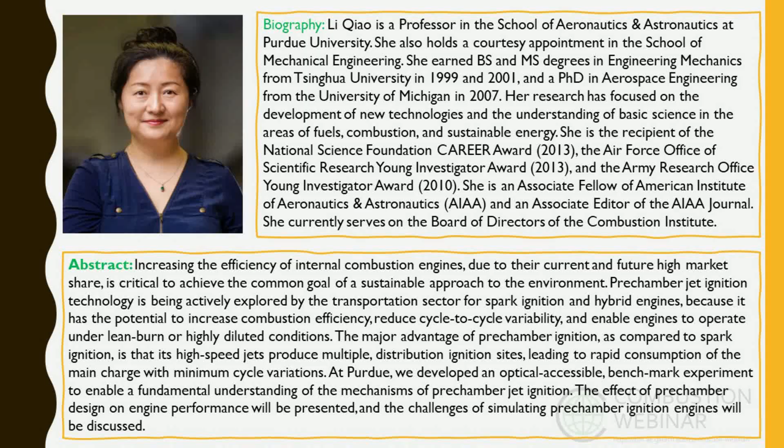Thank you very much, Peng, for your kind introduction. I would like to thank the organizing committee for inviting me to give a webinar. I remember when the pandemic just started, March 2020, we were stuck at home, couldn't go to conferences, couldn't travel. Professor Yiguang Ju and Professor Wenting Sun started this webinar, and quickly we had organizing committee members from all over the world. Every Saturday morning at 10 o'clock, a colleague in the community would share their research with us. This became something we looked forward to during the pandemic. Even though things have gotten better, the pandemic is not completely over yet, but I appreciate this opportunity to connect with colleagues and learn what other people are doing. This is really great.

Today I would like to talk with you about the work on Prechamber Turbulent jet ignition for combustion engines that my group and our collaborators have been doing in the past couple of years. Before that, I would like to acknowledge my graduate students who participated in this research: Dr. Sayan Biswas, who is now an assistant professor at University of Minnesota Twin Cities, and Dong'en Li and Tian Xiaoyu, my current PhD students. The work is sponsored by Caterpillar, Aramco, and Ford.

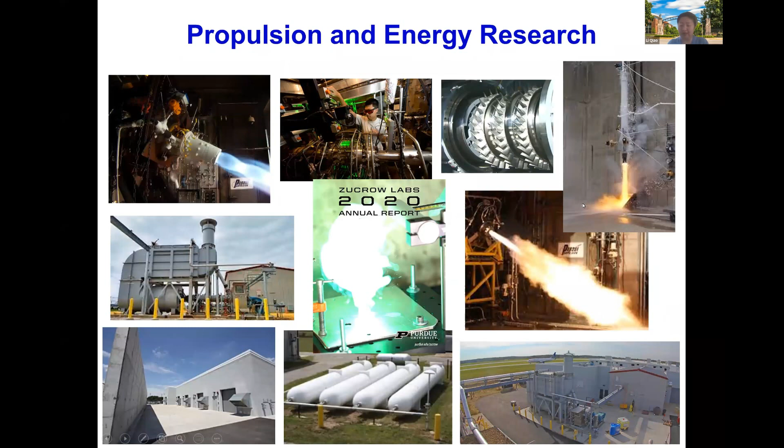Electric cars obviously have a lot of advantages, efficiency and scalability, that's definite. But hydrogen cars, hydrogen derived from renewable sources like water electrolysis, also have a lot of advantages, especially in applications where the energy density requirement is higher.

For hydrogen, there's also competition between hydrogen combustion engine versus hydrogen fuel cell. Fuel cell has higher efficiency, perhaps maximum 52 versus 48 for hydrogen internal combustion engines. But fuel cell has a high requirement on fuel purity - its tolerance to impurity is not that good. Also, manufacturing at scale is a problem, the cost is high.

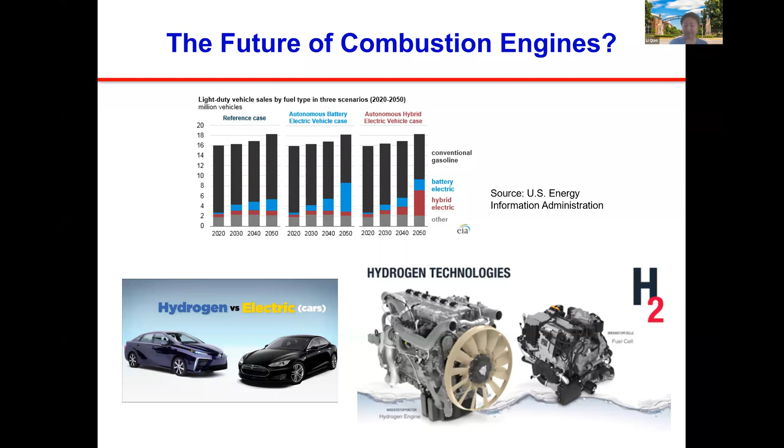So let me talk about what is Prechamber TJI. TJI means turbulent jet ignition. Here I'm going to play two movies so you can clearly see what is Prechamber turbulent jet ignition.

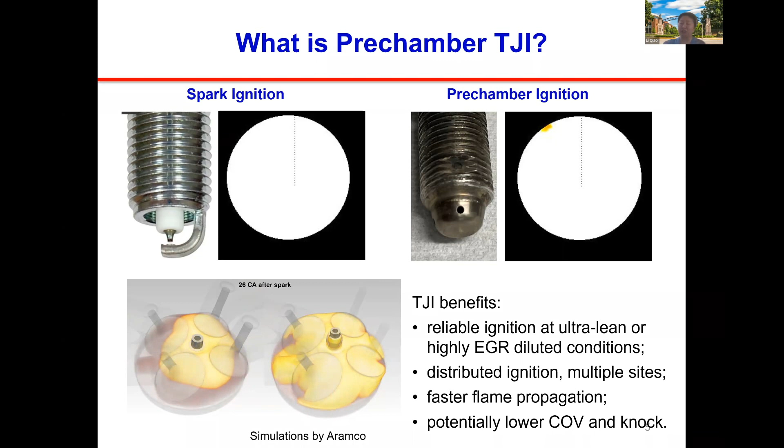So you might ask, what are the benefits of TJI? Well, first of all, for IC engines that are either ultra lean or highly EGR dilution, a challenge is how do we push the limit, because when it's very lean or highly diluted, it's hard to ignite the mixture. Now, TJI has an advantage because the ignition is not point ignition, rather it's distributed, multi-site, on the surface of these jets, which causes reliable ignition, faster flame propagation, and potentially lower cycle-to-cycle variation, and mitigates knock.

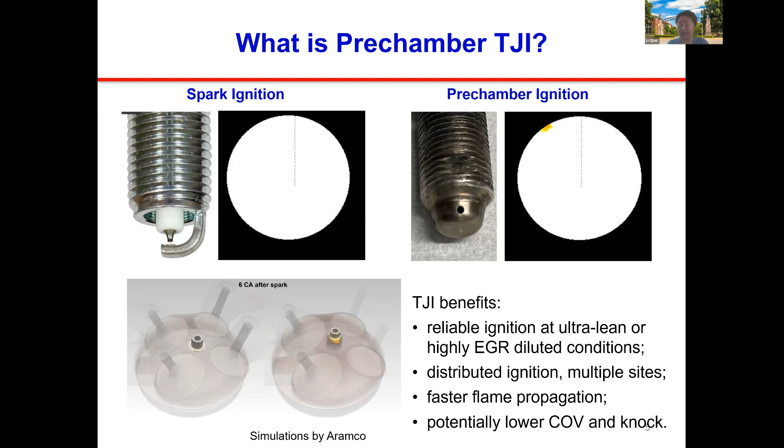So the next question is, Prechamber TJI is not a new technology - it's been around for a few decades. What are the engines that use Prechamber TJI? I want to give you a couple of examples.

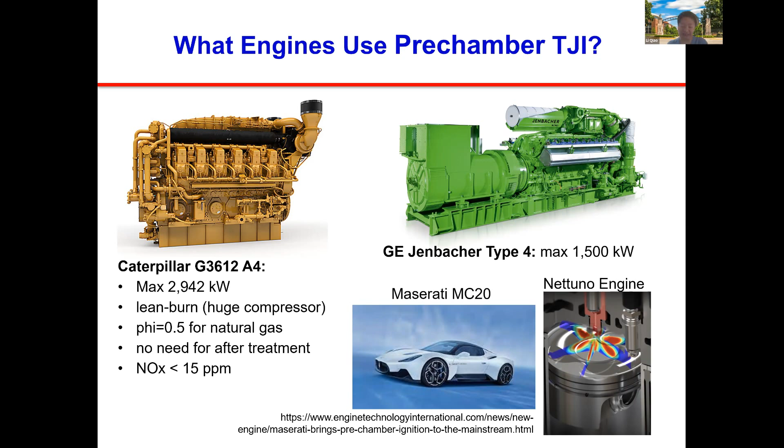Prechamber ignition for gasoline engines is new. Currently, none of the passenger cars on the road use prechamber jet ignition. This is still at a very early exploration stage for gasoline engines. But the good news is that one OEM is putting prechamber in their cars.

In a few years, we'll probably see passenger cars that use prechamber jet ignition. Here I used slides from my collaborator, Dr. Xin Yu at Aramco. We've been collaborating for 3 years. Aramco is a pioneer in prechamber jet ignition technology.

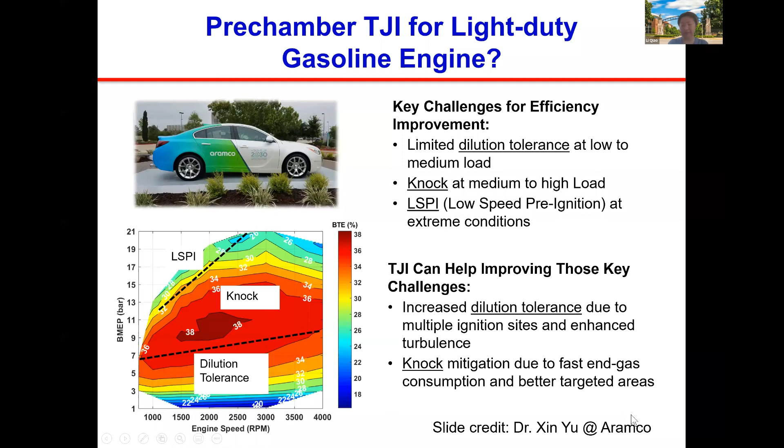In general, prechamber volume is very small, between 1 to 5% of clearance volume. For gasoline engines it's around 1%; for large bore natural gas engines, it can go as high as 5%. The nozzles are very small - the smallest I've seen is about 0.5 millimeter, and the largest, for large natural gas engines, can be as large as 5 millimeters. In terms of number of nozzles, I've seen as few as 4, and the maximum I've seen is 24. These tiny holes have interesting arrangements for optimizing aerodynamics - they're angled, and they could be layered.

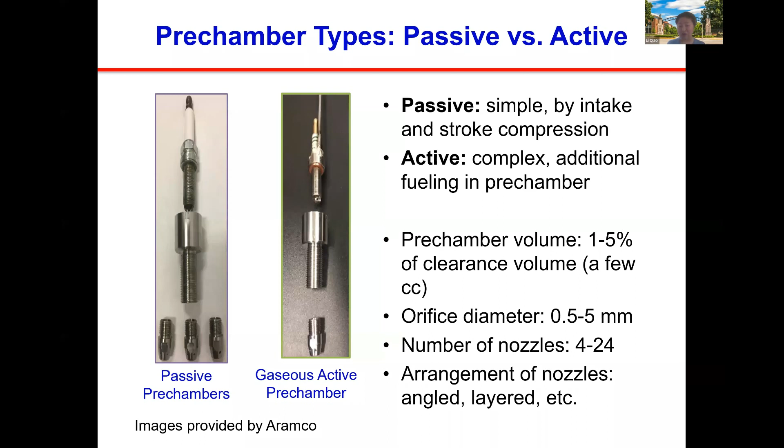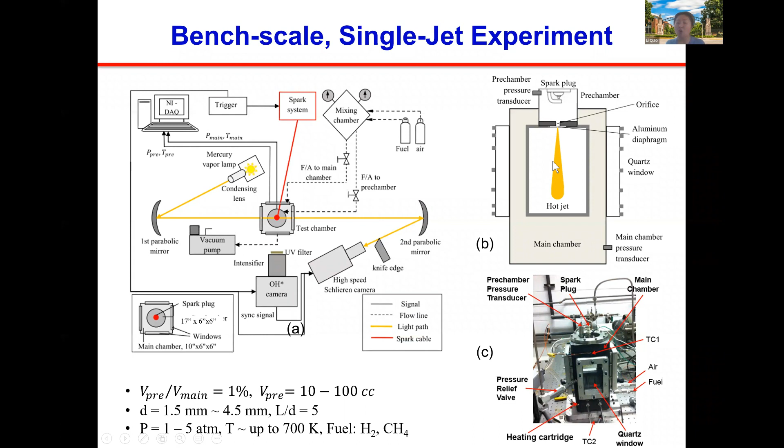Next, I'll share some results from my lab. Fundamentally, you have hot jets - the combustion result from the prechamber - that penetrate into a fresh, unburned, cold mixture. So this is basically a turbulent jet problem. To better understand the fundamental mechanism of jet ignition, we developed a single jet experiment. We designed a prechamber with volume about 1% of the main chamber, with a spark plug and only one nozzle, generating a single jet. Because it's optically accessible, we can do visualization, high-speed imaging, and quantitative measurement to understand how the properties of the jet correlate with the ignition outcome.

First, I want to show you the ignition mechanisms. We tested different prechamber designs, varying the orifice diameter, the nozzle diameter, and the pressure and temperature of the environment. We found there are two ignition mechanisms. The first is called jet ignition - from the images, we can determine that the jet is basically made of hot combustion products with minimal active OH radicals. This basically means that when the prechamber flame tries to pass through this tiny nozzle, less than 1 millimeter, it gets quenched, so what comes out is just a hot product jet.

Let me play this simultaneous Schlieren and OH chemiluminescence imaging to show you - let me play them together. This is one single jet, and this is the nozzle at the very top.

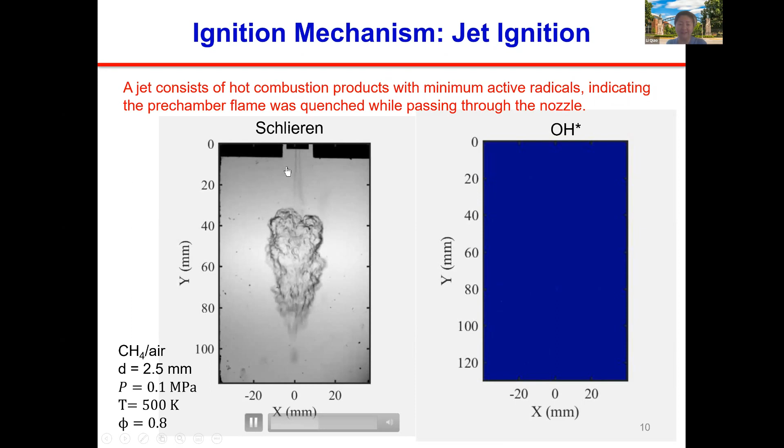Okay, they push some cold gas. Now this is the jet, right? The jet's coming out, and then ignition takes place over here and then it expands.

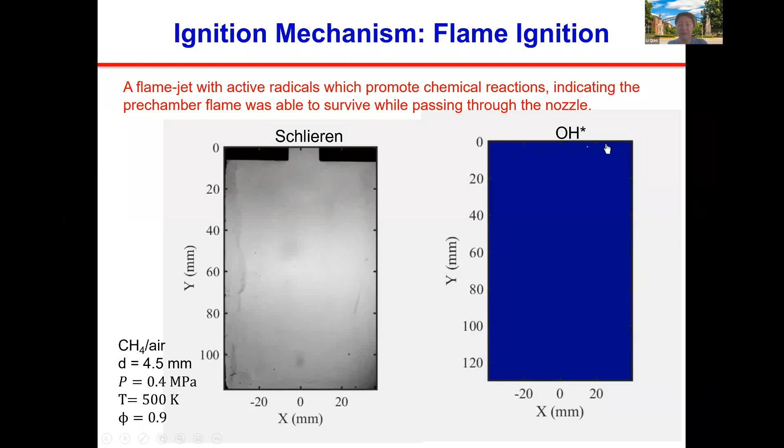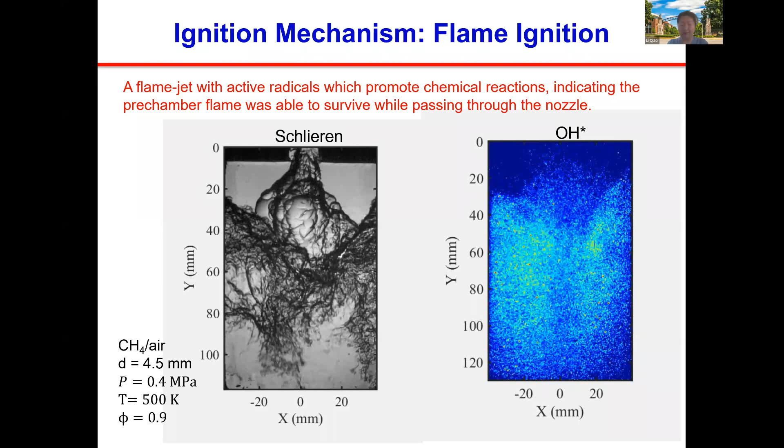I'm going to show you another, which we call flame ignition, because we found a lot of OH radicals when the jet's coming out, which means that when the flame passed through this tiny nozzle, it survived. You still have the flame front with active radicals. So this is perhaps a better illustration.

So when the jet started coming out from the orifices, in the left case, we see appreciable OH signals. But on the right-hand side, there's no signal until sometime later. Downstream of the jet, ignition started to happen and then propagate upward, downward, left and right.

Like expanding. And also from the pressure measurement we see for flame ignition that the main chamber pressure rises quickly, right? Because ignition, burning immediately took place. But for jet ignition, there's a considerable delay.

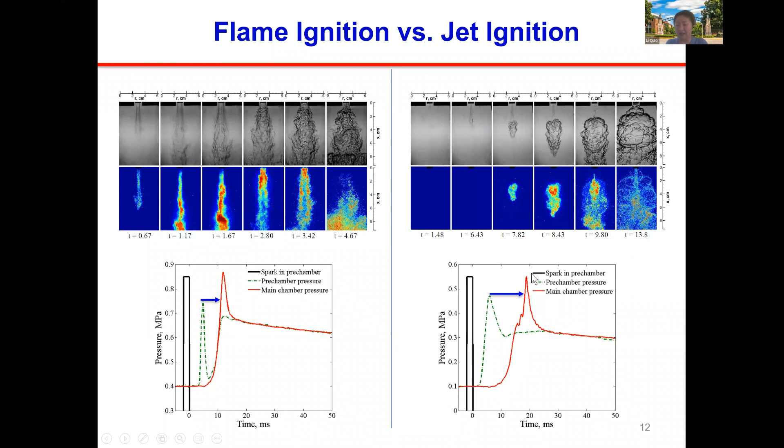That means the jets keep penetrating, and then after some time, perhaps when the environment, which is the Damköhler number, is appropriate, ignition takes place, and we observe the pressure rise of the main chamber like there's a delay.

So this is essentially a fundamental problem: what happens when a flame tries to pass a small nozzle, right? A small channel orifice. This has been studied a lot in the literature.

We know when a flame tries to pass through a small channel, there's heat loss to the walls. There could be radical quenching, and there's also high stretch because these jet speeds are very high, could be a few hundred meters per second. So these flame fronts are highly stretched, which can also cause extinction.

So really the question is, the flame will be able to survive or quench depending on all these factors, right? Stretch rate, heat loss, radical quenching.

Now, what we found was if we decrease the nozzle diameter, we observe more jet ignition, and you can explain that: when the flame tries to pass a smaller nozzle, there's a higher stretch rate and higher heat loss rate, which makes extinction more likely to happen.

Another thing is that if we increase pressure, we find that flame ignition tends to dominate. We tend to find more OH signals out of the jets, out of the pre-chamber. I guess you can use the quenching distance concept to explain it, because quenching distance decreases with pressure. So for the same diameter, as pressure increases, the flame has a better chance of surviving.

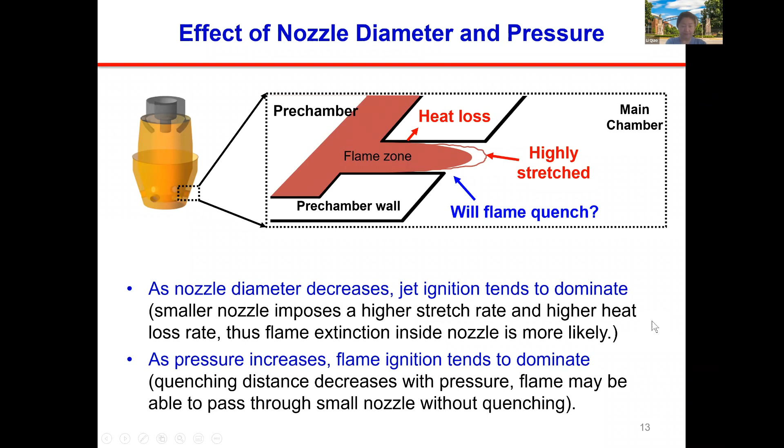I want to play a video that's just for fun, because we observe when natural gas or hydrogen operates at a very lean condition - in this case, phi equal to 0.25 for hydrogen - combustion instability starts to show. You see the flame, the jet flame start to oscillate. That's the instability at lean burn conditions that we will need to address.

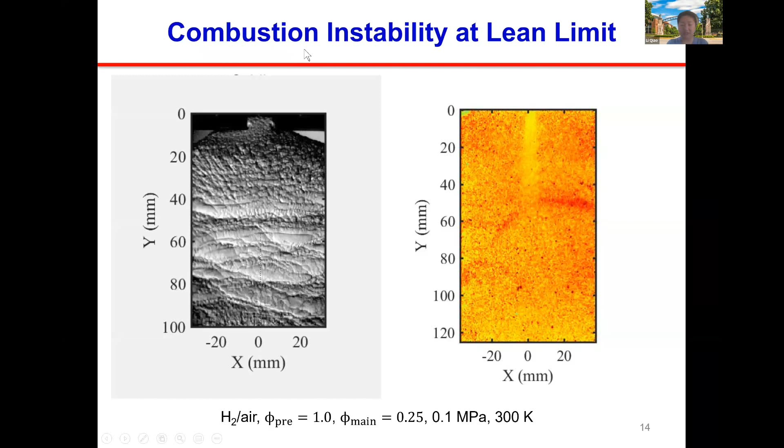Next, I'm going to talk about our engine rig. Basically, our collaborators said, well, these single jet experiments are very helpful - you have quantitative measurements that can help validate CFD or modeling results. But we really want something closer to an engine, so that it will be more helpful in terms of pre-chamber design and optimization. So we developed an engine rig.

This is not really an optical engine. The whole setup is based on a GM 4-cylinder gasoline engine, but we only activate one cylinder, okay? We modified the cylinder, installed optical windows from the sides and the bottom so we can visualize the jet. We also fixed the piston, so it's not moving, because we want to focus on the jet penetration, formation, and ignition processes.

So this is about the setup. I would like to show you a couple of movies to give you an idea of the jet process, which obviously depends on how you design the pre-chamber. Again, because we don't have a dyno, this is a real engine configuration where the inlet and exhaust valves are operated by an electrical motor.

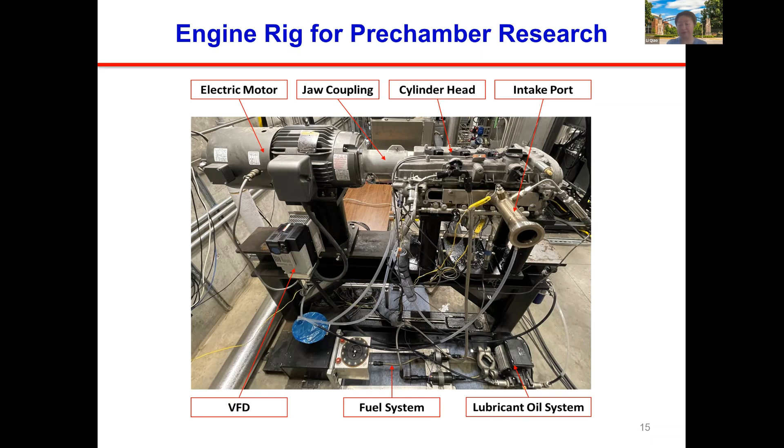So I want to show you the jet formation, penetration, ignition processes, and I'm going to use two pre-chambers. So the left one, as you can see, this is the pre-chamber volume, about 1.2% of the clearance volume.

This pre-chamber has, on the bottom, 6 holes with a nozzle diameter of 1 millimeter. The total area basically means the number of orifices times the area of each nozzle. The volume is about 1,210 cubic millimeters. This is the V/A ratio, a very important design parameter for pre-chamber optimization.

So there are a few cycles in the movie. You see 6 jets coming out and then igniting the mixture and then keep burning the main charge. This is the first cycle. As I said, there are multiple cycles.

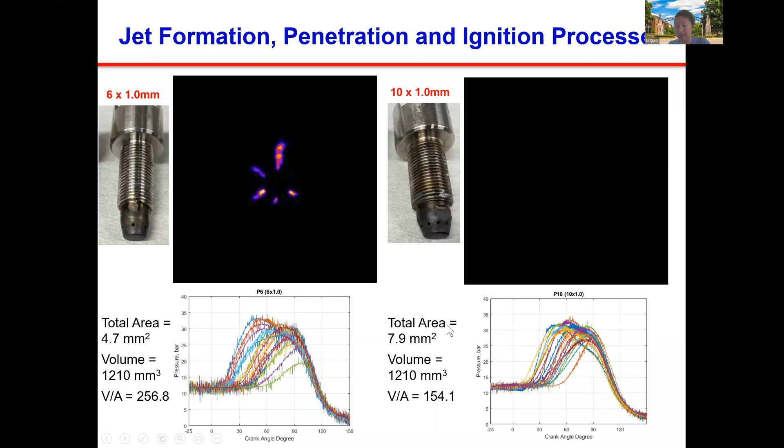Next, I'm going to show you the jet processes for a different pre-chamber. All the parameters are the same between these two. The only difference is I have 10 nozzles. So you see there are 10 nozzles on the bottom of the pre-chamber. The total area increased, but volume and other parameters, including geometry of the pre-chamber, are the same.

So you see 10 jets coming out, pretty uniform in this cycle. Another cycle comes in. You see, in this case, these two jets seem to occur later. A third cycle.

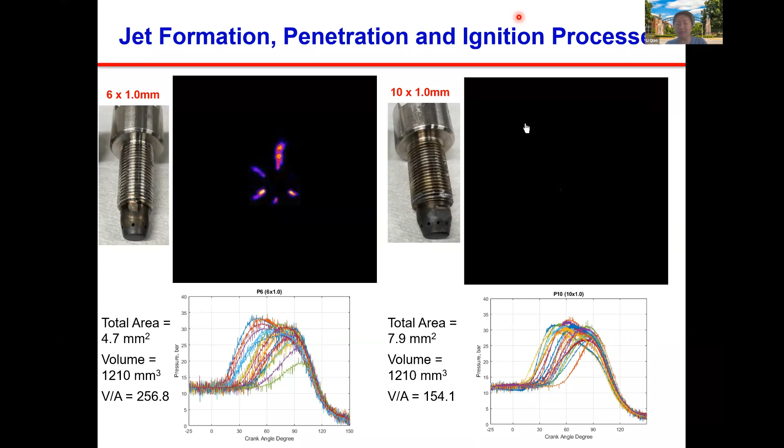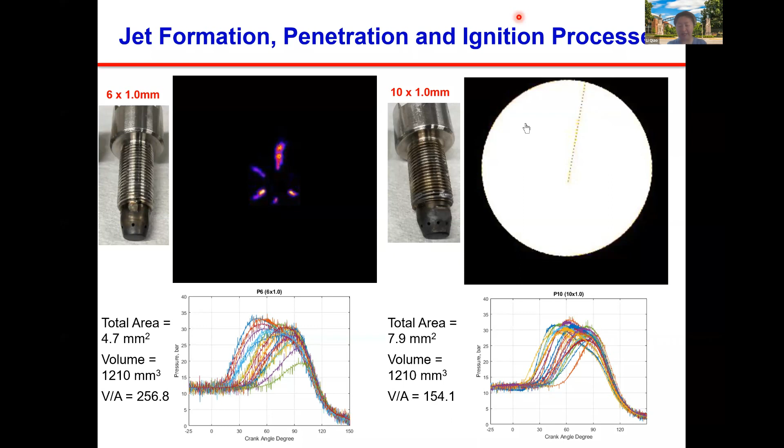All right, so with this visualization of the jets and measurement of pressure, that helps us correlate the jet patterns with the main chamber combustion process, such as burn rate and cycle-to-cycle variation and so on.

From these videos, we observe, in some cases, depending on how many nozzles you have, ideally if you design a pre-chamber with 6 nozzles, you'd like to have strong jets coming out of all 6 nozzles, and then quickly spreading and penetrating into the main chamber. But that's not always the case.

We observe that sometimes the jets are more uniform in terms of performance. Other times, one or a few jets dominate and the other jets just disappear. Here I want to give you an example. This is a pre-chamber with 4 nozzles. The first video shows the jets more or less equally distributed.

Oh, what's going on? Can you see the movie? No.

Okay, it's coming. So this is what I call evenly distributed 4 jets. The 4 jets are more or less symmetric.

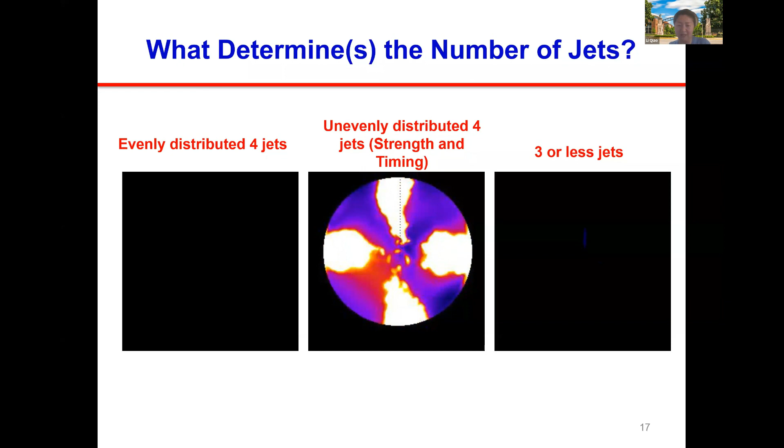Okay, can you see the middle movie? So it looks like the top and right jets ignited the mixture earlier than the other 2 jets. Again.

On the right-hand side, I'm having a little trouble with these videos, but nevertheless, you see 3 jets. That means there's 1 jet coming out, but then it kind of died. This is on the far right. You see the 3 jets, top, bottom, left, but the right jet disappeared.

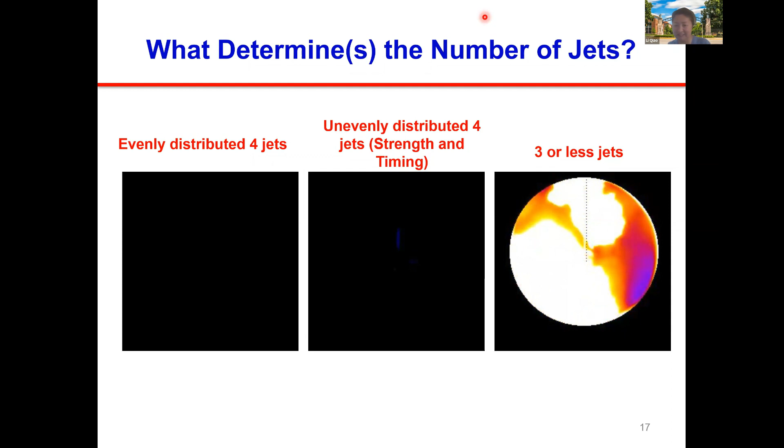So the question really is, what determines the number of jets coming out from these nozzles, and what are the properties of the jets? For sure, we know the property of the jets, such as velocity, turbulent kinetic energy, temperature, and dissipation rate, are all responsible for the outcome, which is ignition and flame propagation.

But the question here is that ideally we would like to have as many jets as possible coming out, and then each of the jets would be able to ignite and quickly consume the main charge. So what determines the number of jets?

So we did some simulations using Converge. The conclusion is that the key factors are pre-chamber lambda and EGR distribution. This means the average lambda and EGR level are important, but the distributions are equally important, if not more.

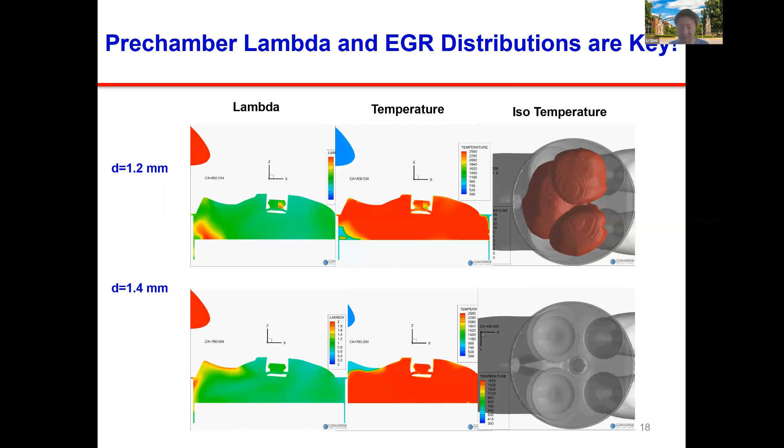Let me... Okay, now the bottom one, let's see if my mouse works. Okay, the bottom one looks like it's playing now, the movie. Again, you see the jets start coming out from the right. In the left one, actually, we did not see a jet. Again, that's related to the local lambda in the nearby region of each nozzle.

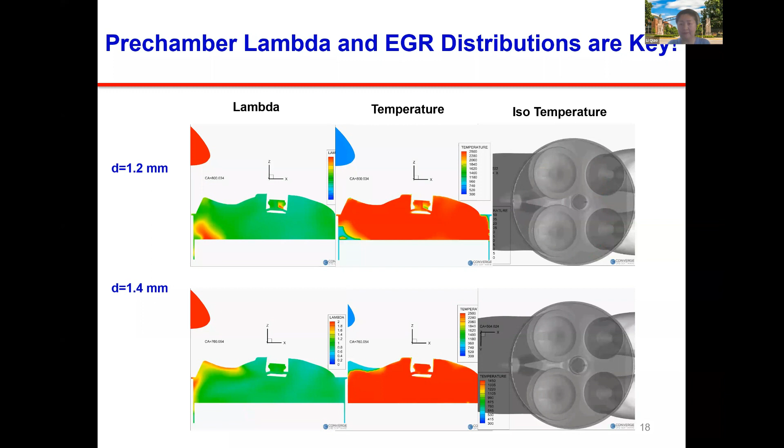Now, next couple of slides, I want to share with you some of the engine testing results, which are very promising. I hope that you will get excited about these. Again, these results are from my collaborator, Dr. Yu from Aramco. So they did engine testing of pre-chambers.

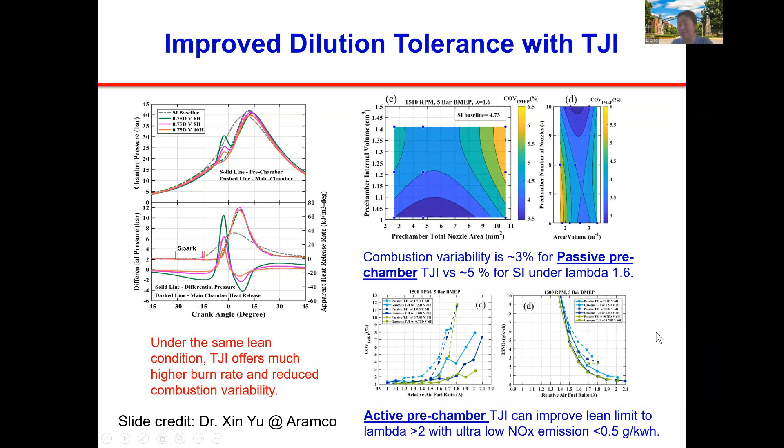Now the bottom one shows the COV and NOx level for passive and active pre-chambers. One significant finding is that if you look at these bottom 3 curves, those are for active pre-chamber. Basically, they injected methane as a fuel to the pre-chamber, active pre-chamber. So this can push the lean limit, the lambda value, from typically 1.7, 1.8, now to above 2. So TJI can improve the limit to above 2. And if you look at the NOx emission, it's less than 0.5 grams per kilowatt hour.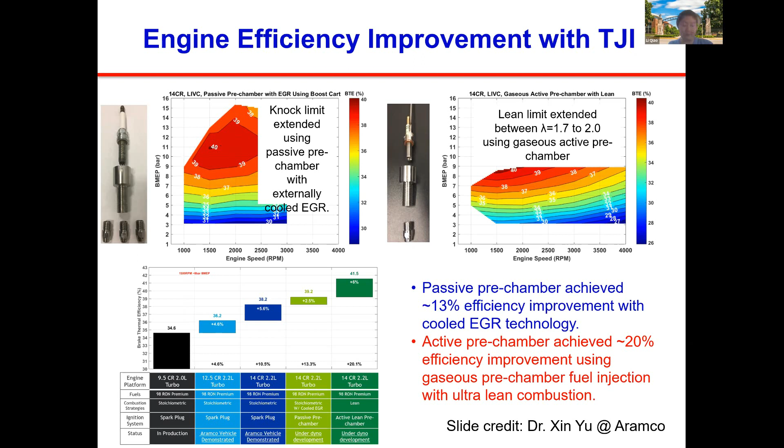All right. So I've described some promising engine testing results of both active and passive pre-chambers. Next, I want to talk about challenges of simulating pre-chamber ignition engines. We often hear from our collaborators and colleagues in industry that many of them use CONVERGE simulations.

It's hard to match engine testing results with simulations, and this has caused us to really think about what really happens to the combustion mode when you add a prechamber to a gasoline engine or a large bore natural gas engine. So here I have the famous Borghi-Peters diagram.

I know everybody is very familiar with this. This diagram is in log-log form, so the whole area is divided into different zones because the physics are different in terms of combustion mode. For example, laminar flames, and on the right-hand side, wrinkled flames, corrugated flamelet. Here is basically flamelet, and then all the way to wrinkled flame, thin flame, and eventually thick flame. This region we used to call broken reaction zone. For SI, spark ignition operation, it's here - this is the brown area. Mostly the condition falls into the corrugated flamelet zone.

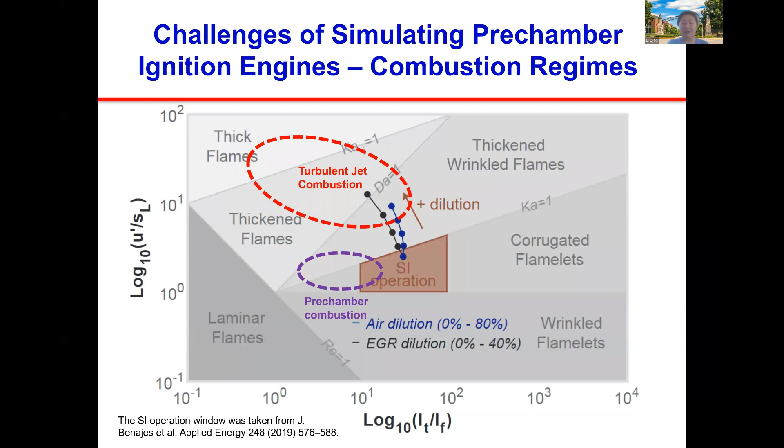Okay, this is my last slide. I would like to share with you, in terms of pre-chamber jet ignition, we found there are two ignition mechanisms. If you ask me which mechanism for gasoline engine or natural gas engine, my answer is no, because it depends on your design of the pre-chamber, like how many nozzles, the size of the nozzle, and the operating temperature and pressure and so on.

But one thing is for sure is that in terms of turbulent kinetic energy, the jet contains much, much higher turbulent kinetic energy than the flow in the pre-chamber and the flow in the main chamber. And these kinetic energies are self-induced. Because of that, the jet ignition combustion, when the jet comes out, that process may fall into the thick flame zone or thickened flame zone.

However, most combustion devices operate in the thin reaction zone. So this makes modeling these processes very challenging.

Now, engine testing results have given very promising results. I have reported to you, pre-chamber TJI can increase dilution tolerance and also mitigate knock due to fast end gas consumption. Engine testing shows the efficiency can be increased by 13% for passive pre-chamber and nearly 20% for active pre-chambers.